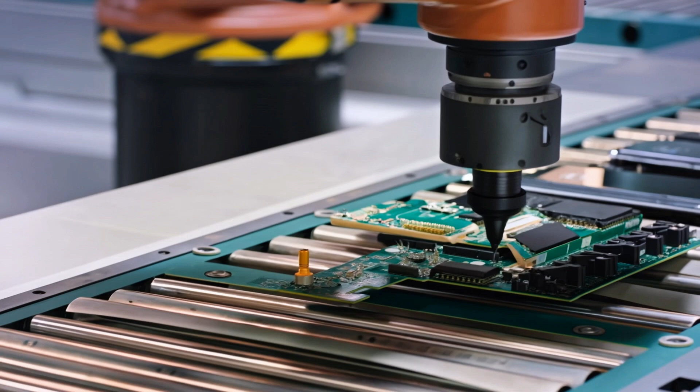Smartphones evolved, cars evolved, medicine evolved, even farming became automated, entire industries transformed. But construction, it still looks almost the same. Workers arrive on site, materials are delivered in pieces, schedules slip, budgets explode, and somehow, delays are still expected.

Construction productivity has barely improved in over 100 years. While manufacturing became automated and technology became exponential, construction remained largely manual. And that's surprising, because construction builds everything: homes, hospitals, highways, entire cities. So why didn't it evolve the same way?

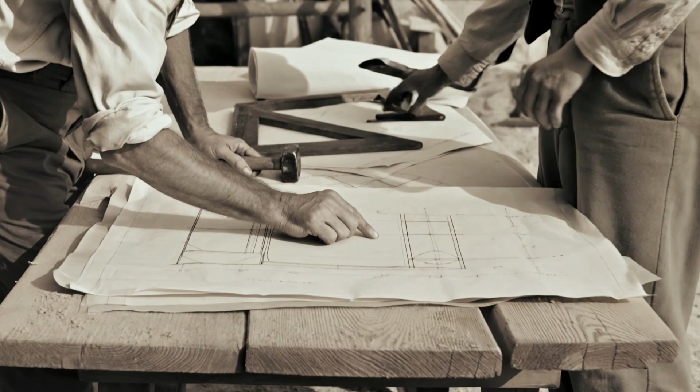In the early 20th century, construction relied on manual labor, paper blueprints, and mechanical tools. A century later, most job sites still operate in surprisingly similar ways. While factories embraced robotics and software replaced clipboards, construction often remained dependent on human coordination. That gap widened over time.

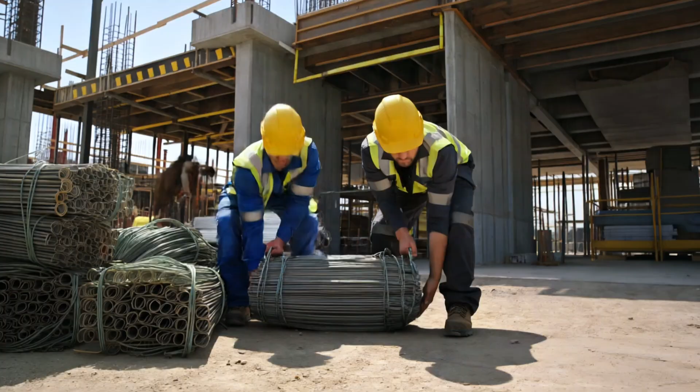Because every building is different, different land, different regulations, different weather, different teams. It doesn't happen inside a controlled factory. You can't mass-produce skyscrapers. At least, not easily.

But complexity isn't the only issue. Construction doesn't just struggle with uniqueness. It struggles with coordination. Most large projects involve dozens of contractors, architects, engineers, suppliers, subcontractors, each working on different timelines, often using different software, different communication systems.

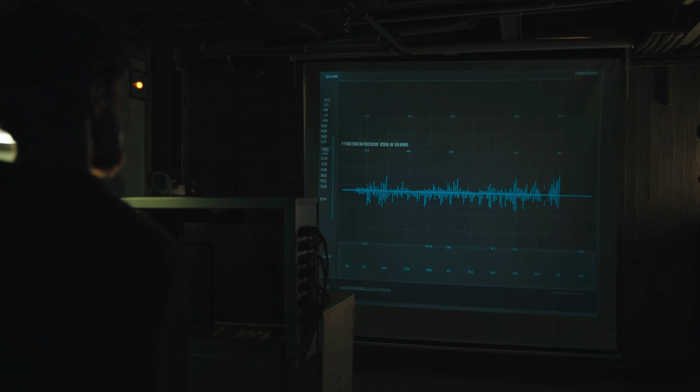Small misalignments turn into major delays. A late delivery here, a design revision there, a permit delay, and suddenly, the entire schedule shifts. Then budgets follow. Globally, construction overruns cost hundreds of billions of dollars every year.

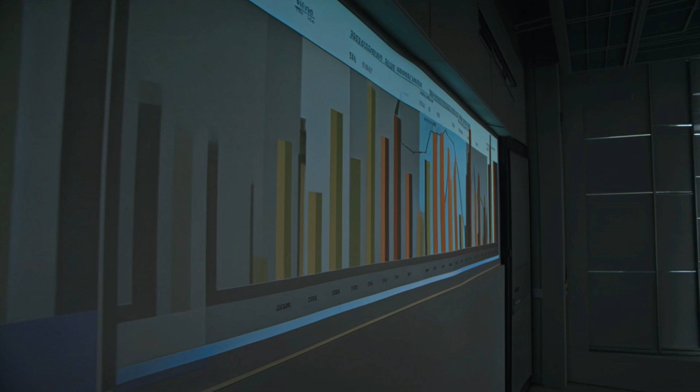Large projects regularly exceed their original budget, not by small margins, but by millions, sometimes billions. And when timelines stretch, costs compound, interest grows, labor extends, materials fluctuate. What started as a plan becomes uncertainty.

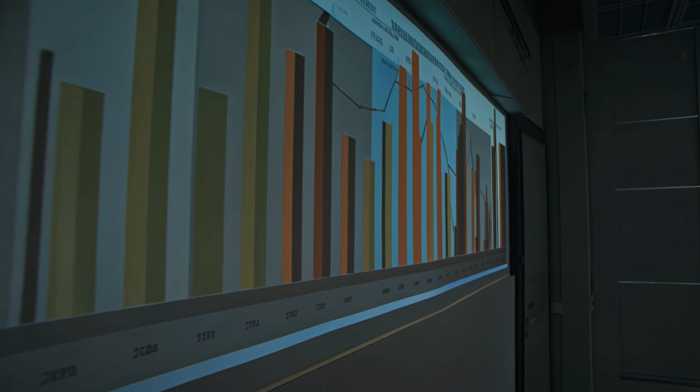Major infrastructure projects frequently run over budget. In some cases, costs exceed original estimates by 20 to 50%. Delays compound interest payments. Labor extends. Material prices fluctuate. What begins as a carefully planned project can turn into years of uncertainty. And the larger the project, the greater the risk.

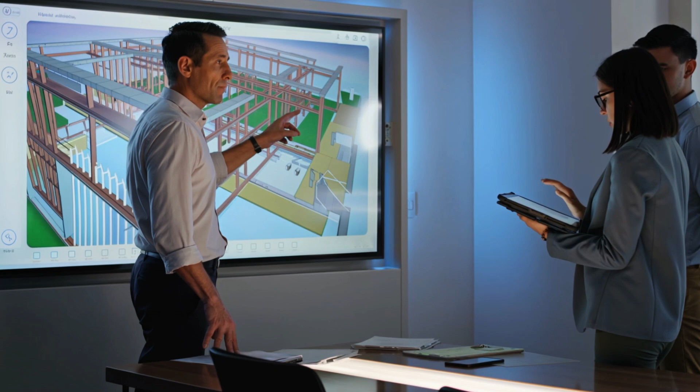But something is beginning to change. Not through massive demolition, not through sudden disruption, but through data. Artificial intelligence is entering construction quietly, not to replace workers overnight, but to reduce uncertainty.

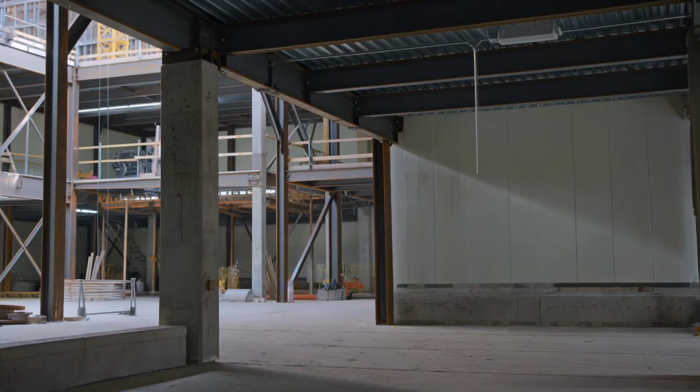AI systems can now analyze thousands of schedules in seconds. They can detect conflicts before crews ever arrive on site. They can track materials across global supply chains. They can simulate structural stress before concrete is poured.

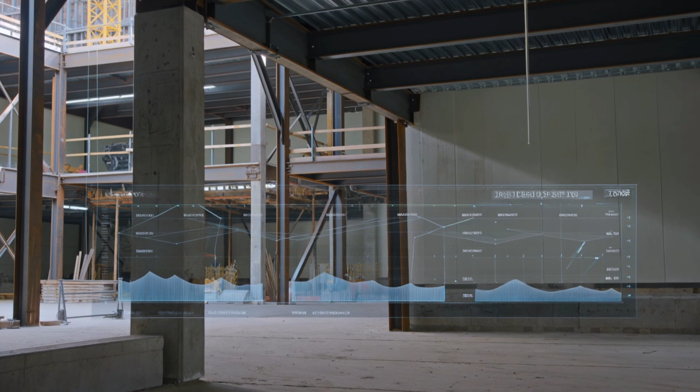This is known as a digital twin, a virtual replica of a building that evolves alongside the real one. Engineers can test changes without risking delays. Developers can predict overruns before they spiral.

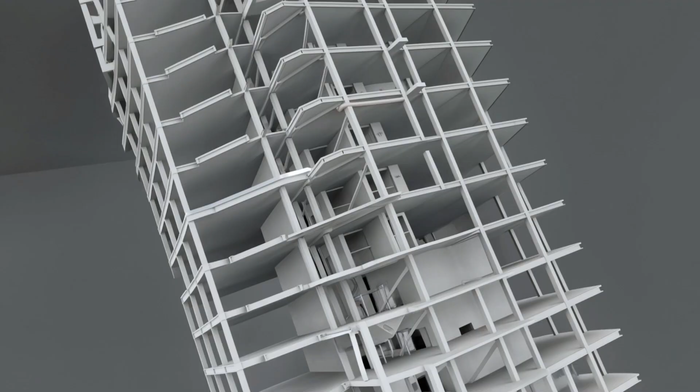And once construction becomes digital, it becomes transparent. Once it becomes transparent, it becomes predictable. And once it becomes predictable, it becomes optimizable.

And optimization changes everything. When schedules improve, delays shrink. When coordination improves, costs stabilize. When risk becomes predictable, investment becomes safer.

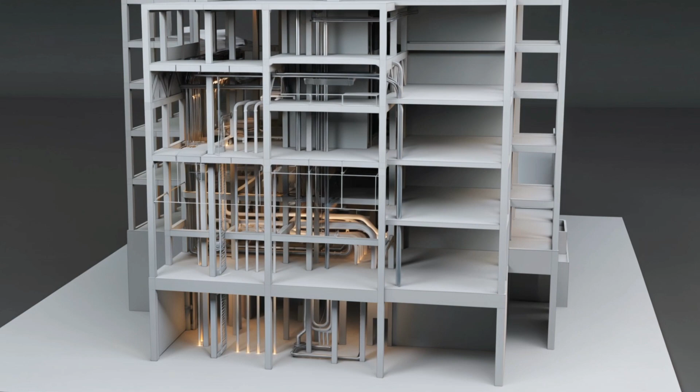On complex projects, AI systems can detect clashes between electrical, plumbing, and structural systems before construction even begins. Instead of discovering conflicts on the job site, teams resolve them inside software. Weeks of delay can be avoided before ground is ever broken.

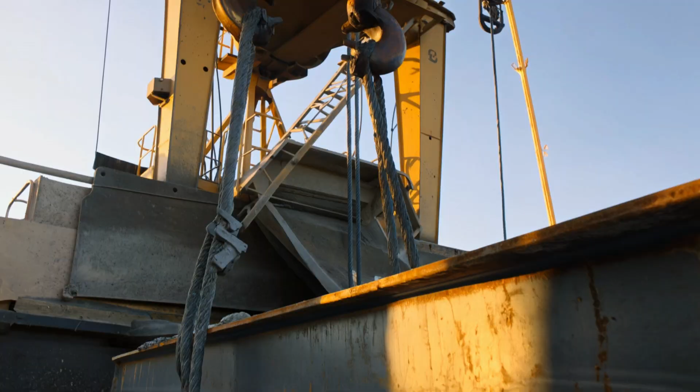Construction built the modern world. Every skyline, every bridge, every road we travel. But the next century of building will not look like the last one.

As construction becomes data-driven, it will move faster. As it becomes optimized, it will waste less. As it becomes predictable, risk will shrink. Housing could become more accessible. Infrastructure could become more resilient. Cities could become more adaptive.

Change in construction does not move at the speed of apps. It moves at the speed of infrastructure, concrete, steel, foundations. But when systems shift, entire cities shift with them.

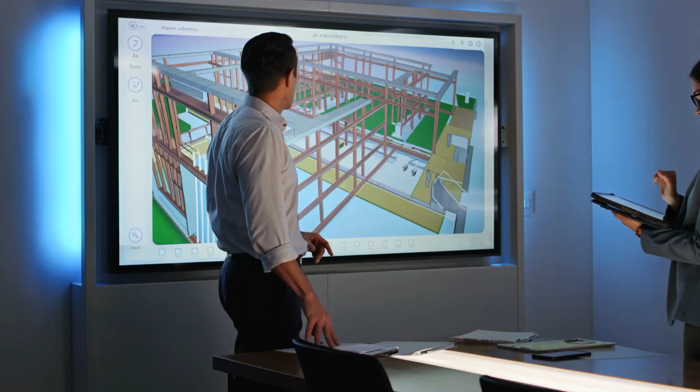Some companies will adapt quickly, others will resist. Some workers will learn new systems, others will struggle to keep up. The industry will not collapse. It will evolve, gradually, systematically, and then, suddenly.

Because once construction becomes intelligent, it won't just build structures, it will build systems. The real question isn't whether construction will change, it's how quickly. The future isn't coming, it's being built.